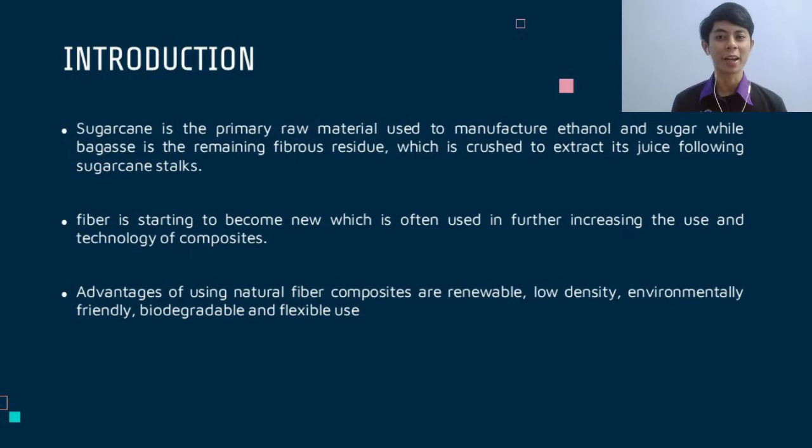So, introduction. As we know, bagasse is from sugarcane, which is a raw material that has been manufactured to collect the ethanol and the sugar, and the remaining fibrous residue is what we call bagasse. We also know that natural fiber use is increasing in composite technology. There are many benefits of using natural fibers, such as renewability. It is renewable, it's low density, which means it is light, it's environmentally friendly and biodegradable, and it's flexible.

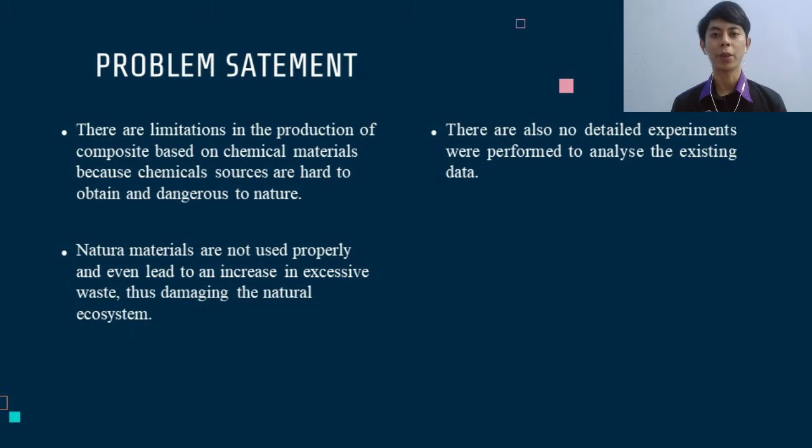So we move to the next slide, which is the problem statement. There are three problem statements. The first one: there is a limitation on producing composites based on chemical materials, because they are not good for nature or the ecosystem, and they're hard to find. The second one is that natural material nowadays in the entire world is excessively wasted, and this is damaging the ecosystem. The third one is there is still no detailed experiment performed to analyze the best way to make a good biocomposite.

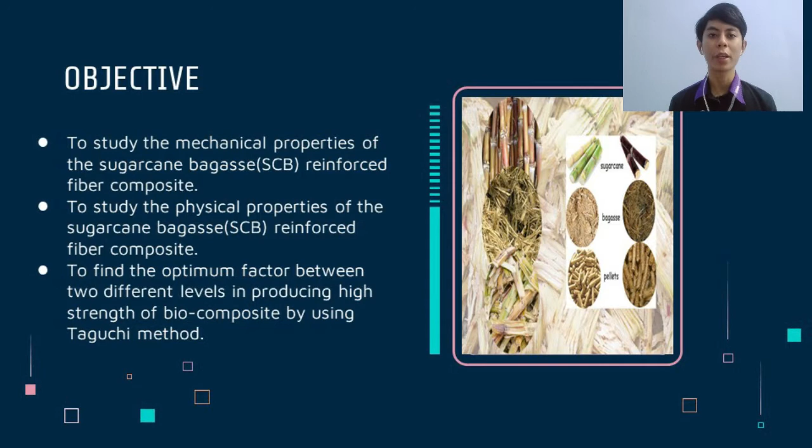So we move to the next slide, which is the objectives. There are also three objectives. The first objective is to study the mechanical properties of the sugarcane bagasse reinforced fiber composite. The second one is to study the physical properties of the sugarcane bagasse reinforced fiber composite. And the third one is to find the optimum factor between two different levels in producing a high strength biocomposite by using the Taguchi method.

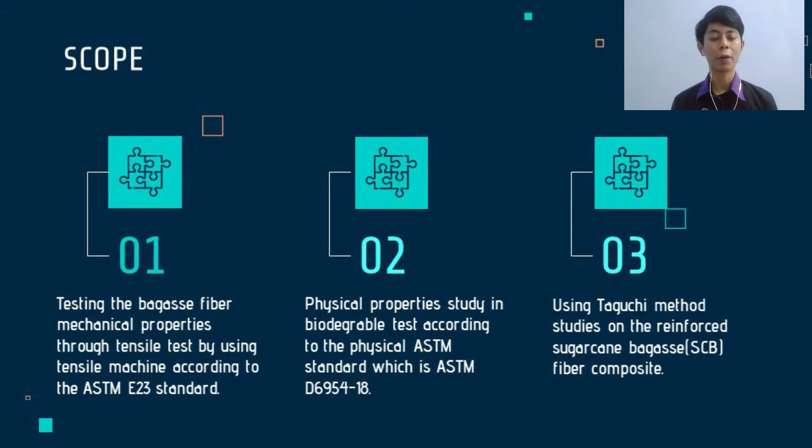So we move to the next slide, which is the scope. There are three scopes. The first one is we will test the bagasse fiber using the tensile test at the ASTM E23 standard. For the physical properties, we use the biodegradability test at ASTM D6954-18. And the last one is we use the Taguchi method based on the results of the tensile test and the biodegradability test to find the optimum factor and level to make a good biocomposite.

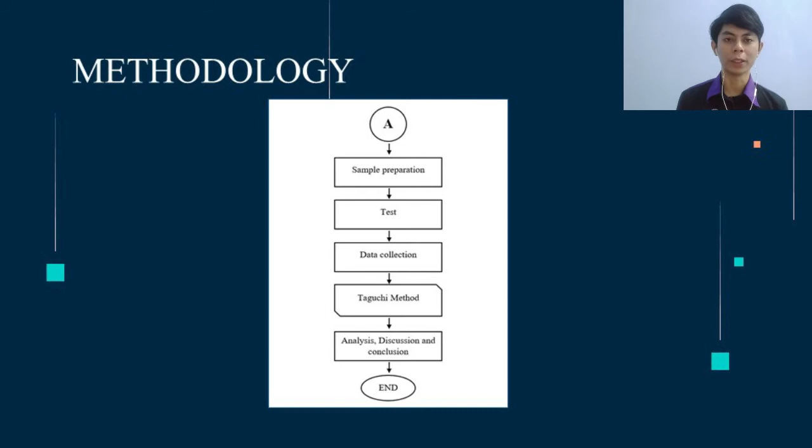From Minitab, by doing the Taguchi method, we can know which factor at which level gives the greatest strength of our new natural biocomposite. After we do the Taguchi method, the tests, and the data collection, we analyze, discuss, and conclude it in our project. That's the end of the project, and then we move to the next slide, which is the sample preparation.

First things first, we need to do the bagasse preparation. To do that, we must have the sugarcane. From the sugarcane, we extract it to remove the ethanol, sugar, and liquid, and then we dry it for a day or two to make the bagasse dry. After the drying process, we remove residue to make the bagasse cleaner. Then we crush it to make the bagasse smaller and fine. That completes the process to make crushed, fine, smaller bagasse.

After day 1, we move to day 2, where we add the additive composition. We have three components: bagasse first, then the PVA glue, the cassava starch, and then the size of fiber. We mix it to make our new biocomposite.

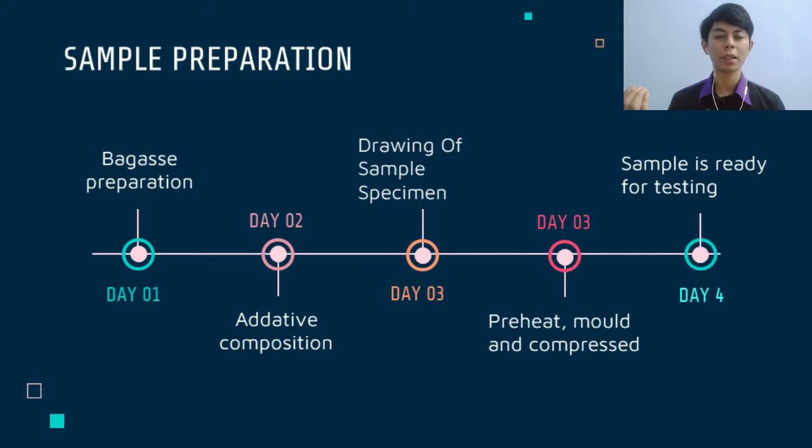The next day, day 3, we draw our sample. As you can see, this is the sample drawing, which is a dog bone shape, so that it's easy to do a tensile test. To make the dog bone shape, we preheat our new biocomposite that has been mixed, then we mold it, compress it, and design our dog bone shape. After that, the sample is ready for testing.

And then we do the biodegradability test, where we use soil and run a biodegrade test for maybe 2 or 3 weeks to get the result for the physical properties of our new biocomposite, and the tensile machine for the mechanical properties. And then from there we do the Taguchi method.

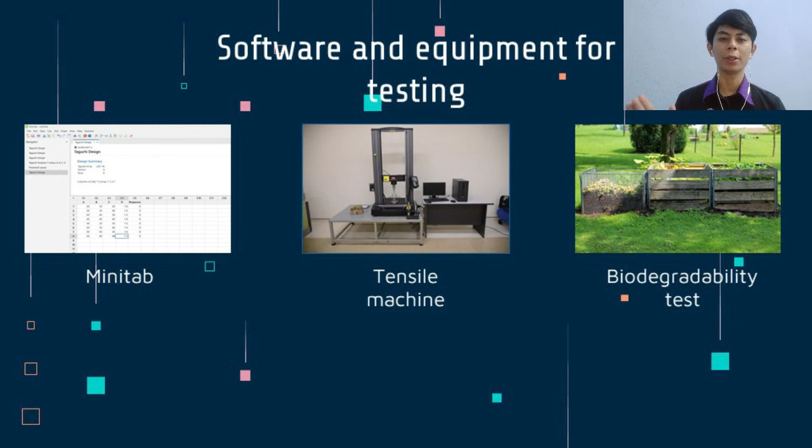For the Taguchi method, this is the preliminary finding or expected result, as shown in Minitab while doing the Taguchi method. So this is the result. We don't have the main result yet because we still don't have the responses from the tensile test and the biodegradability test, meaning we don't have the values for all 8 experiments for the tensile test and the biodegradability test.